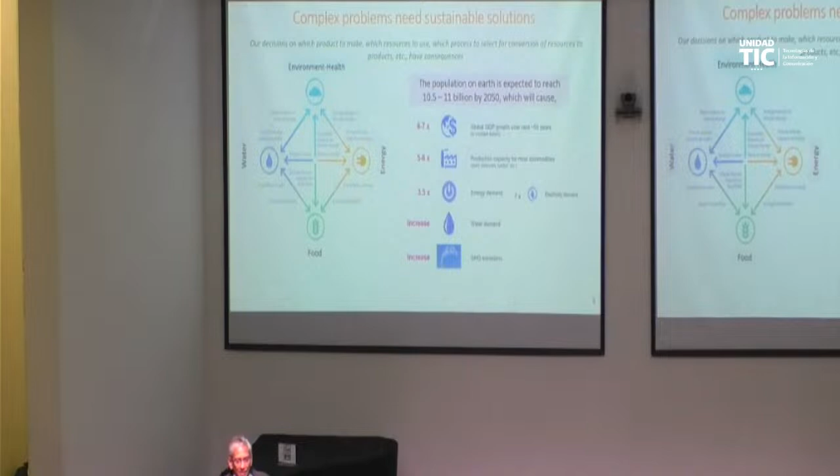And also, if we take into account that by 2050, we on Earth will have between 10 to 11 billion people, and because of that increase in population, the general GDP will need to increase. That will mean we will have to produce more products that we need on a daily basis. Because of that, we will need more energy, more electricity, more demand for water, and all these activities will increase greenhouse gas emissions.

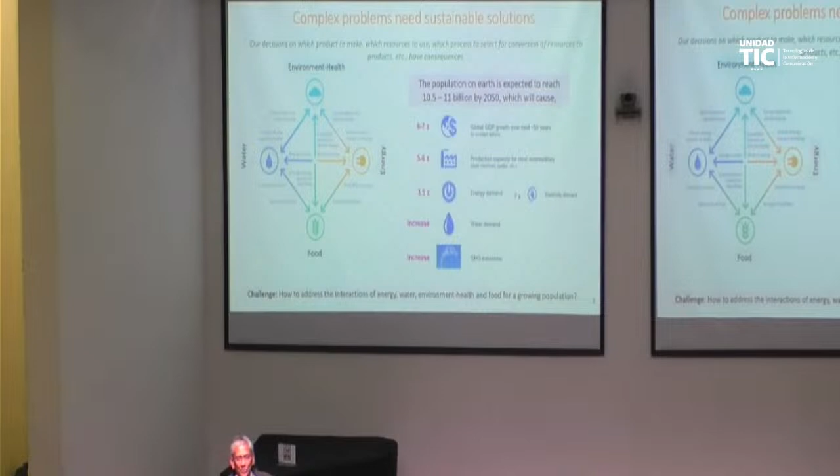So that's a complex, challenging problem. And the question is how to address the interactions of energy, water, environment, health, and food for this growing population, because the population is going to increase.

What this lecture is all about is what can we do to address those challenges. Let's review first how we are getting all the products we need to stay on top. We find out which resources we will use, and we will convert them to products. But in order to do this, we need to use energy, we need to use water, we need to use all kinds of resources.

And as a consequence of this, we impact the environment - the global warming potential increases, ozone depletion increases, toxicity level increases, and many more. At the same time, we produce a lot of waste. So if we think of that, all the processes that give us the products we need, from the raw material, the U-tube that you see could be representing all the processes on Earth. All the resources we put into the U-tube, and we get only 25% of useful products or useful services. And that is not sustainable.

It's too much waste. And according to most experts, and this last number was given in 2007, it has not changed very much. We need to improve our processes by order of magnitude, not small improvements step by step, but order of magnitude improvement. So for sustainability, significant and rapid improvements are needed.

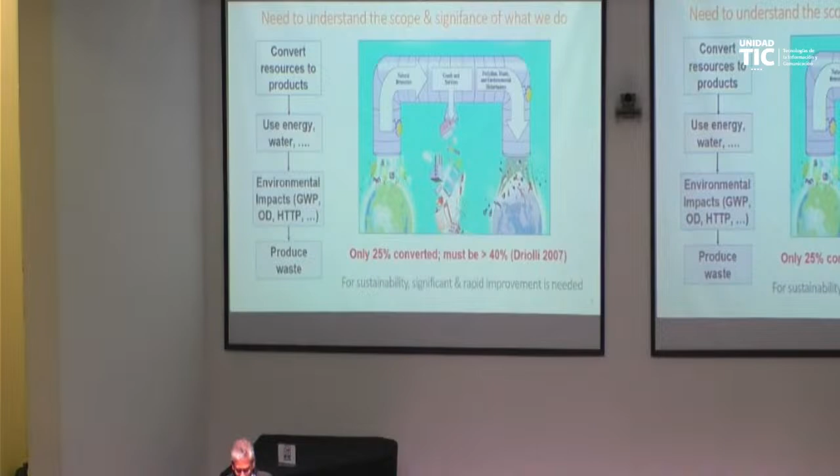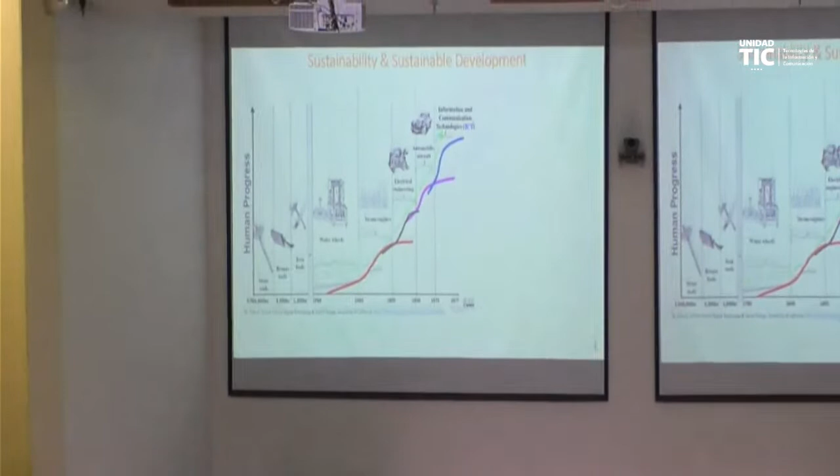Now I will briefly explain what we mean by sustainability and sustainable development. On the y-axis, you will see a green curve going up, representing human development or human progress on Earth. At different times, you can see some curves going up and going down. Those curves show different technologies that, before they became redundant, we found another technology to take over, so the green curve can always go up.

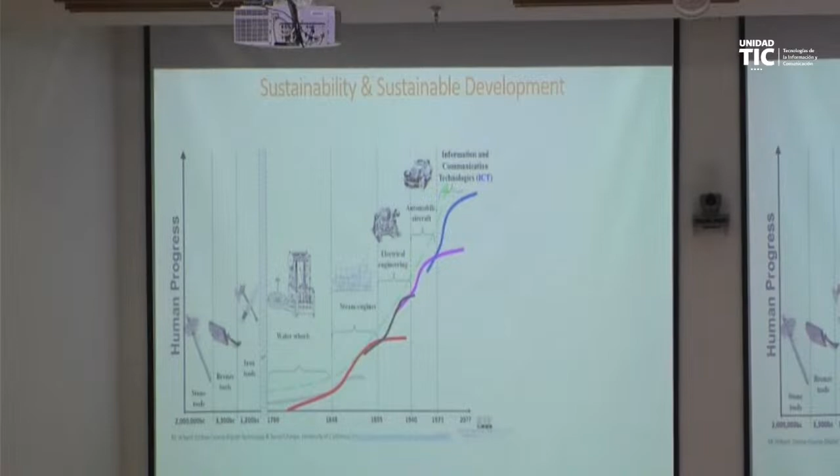And as long as this goes up and we can replace any redundant technology with some new technology, we on Earth can continue. So from that point of view, sustainability means the ability to sustain or the capacity to endure changes. And sustainable development means development that meets the needs and aspirations of the present without compromising the ability of future generations to meet their needs.

And this is a very important point. We have to question ourselves: are we doing what we are doing now without thinking of what will happen to the next generation? One could question that many of the things we are doing now are going to negatively affect future generations. But that is not what sustainable development was supposed to mean.

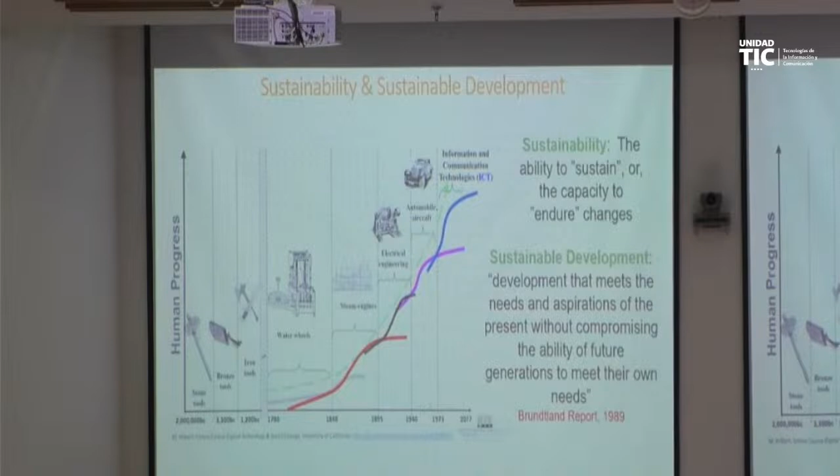One question is, which is the redundant technology that we are going to get rid of, and what new technology is going to come? Would it be a new way of communication through smartphones, maybe even smarter phones, or communication or travel? What would be the next technologies that before they became redundant, we found new ones? That hasn't been decided yet, but we have to see what will happen.

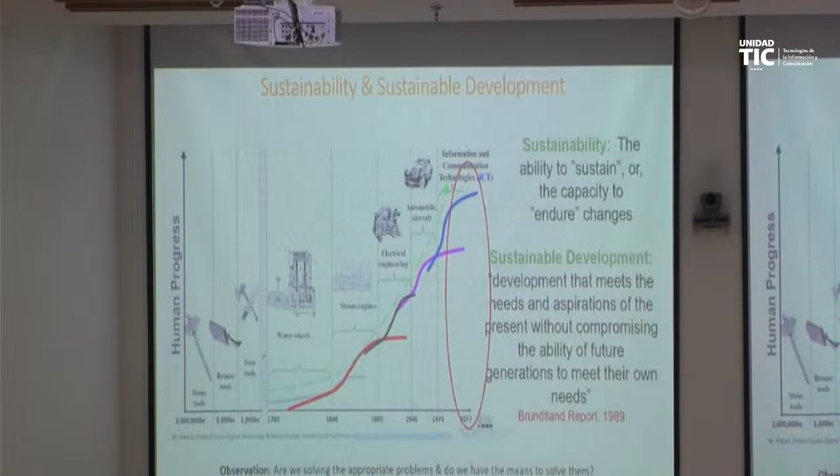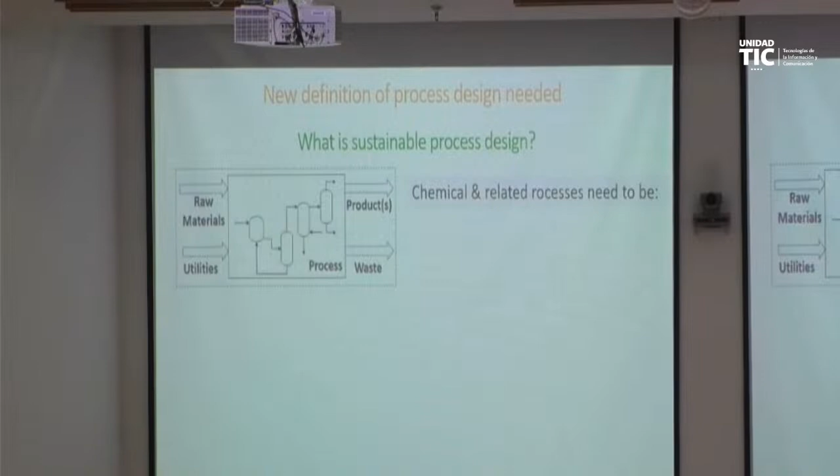We need to improve this definition. So we say that it has to be sustainable. That means it has to be economically feasible. It has to reduce the waste. It has to be utility efficient, meaning electricity, energy, water - they have to be more efficient in terms of usage. It has to be environmentally acceptable. It has to be safer. It has to be operable, and many more. All these things need to be included in the design of the chemical process.

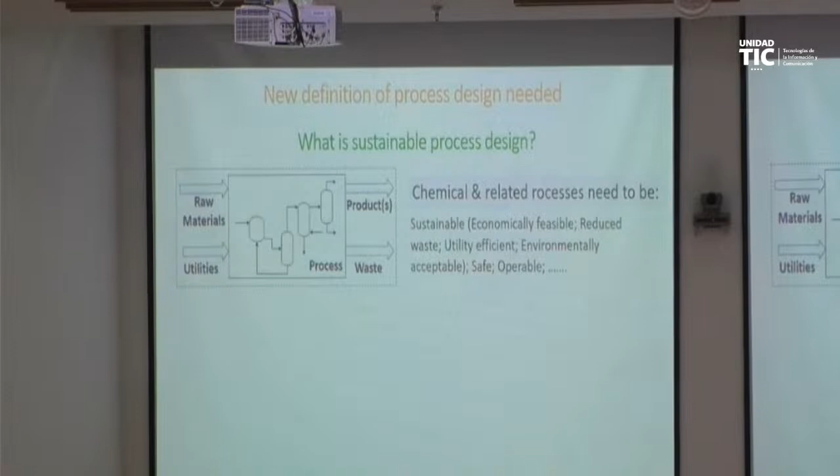So then what we can say is that in addition to satisfying all those criteria, the design that we make has to establish a sustainable production, which means how long in the future the process can work to give us the product, adjust to changing markets, survive global competition, tackle demands for innovative products, and many more. So sustainable process design in this case means synthesis of the process, design of the process, and innovation of the process.

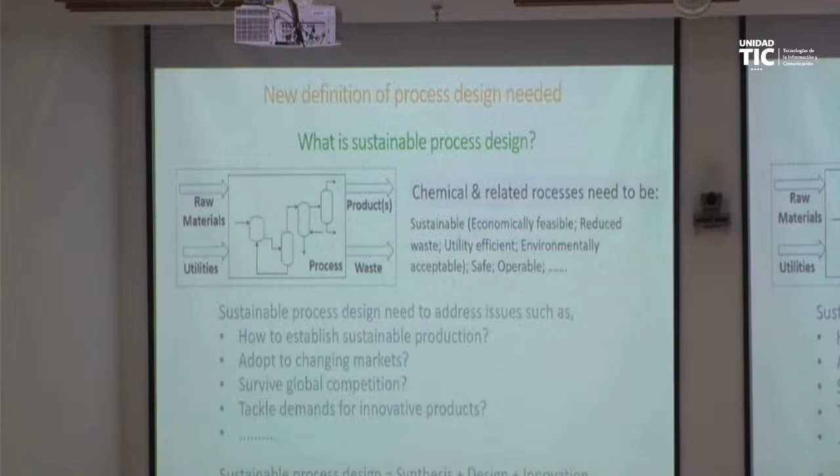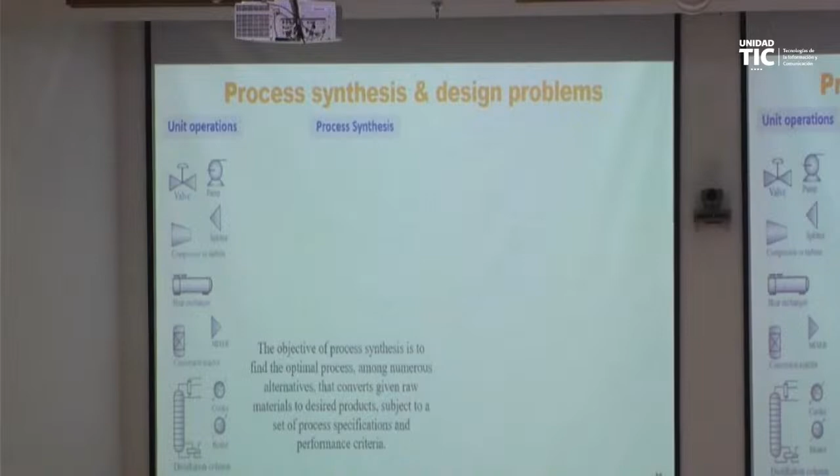And very briefly, what do we mean by synthesis? We mean that if we have raw materials and we want to convert them to a product, how many processing steps will be needed, and what kind of process operations would be needed. What you see on the left is a list of process operations. So how do we configure them, and in which sequence will they be needed?

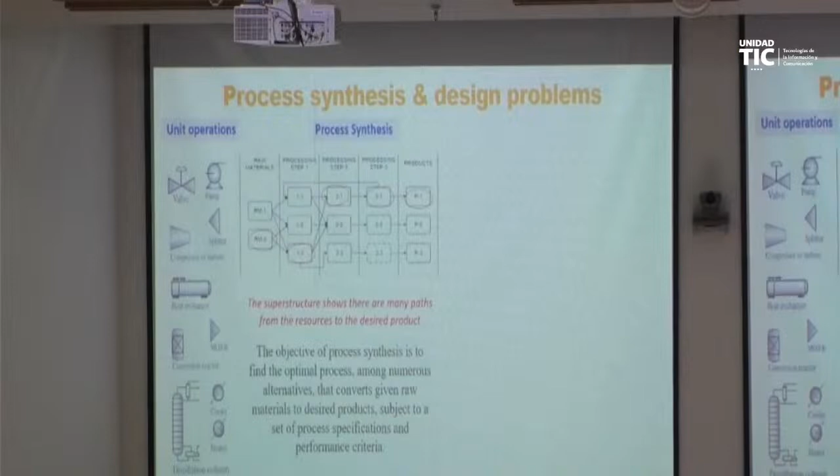So that would be a process synthesis problem. There are different alternatives shown in the picture, and what we want is the ones marked in red. So that would be, for example, an optimal processing path or a flow sheet that will convert a selected raw material into a desired product.

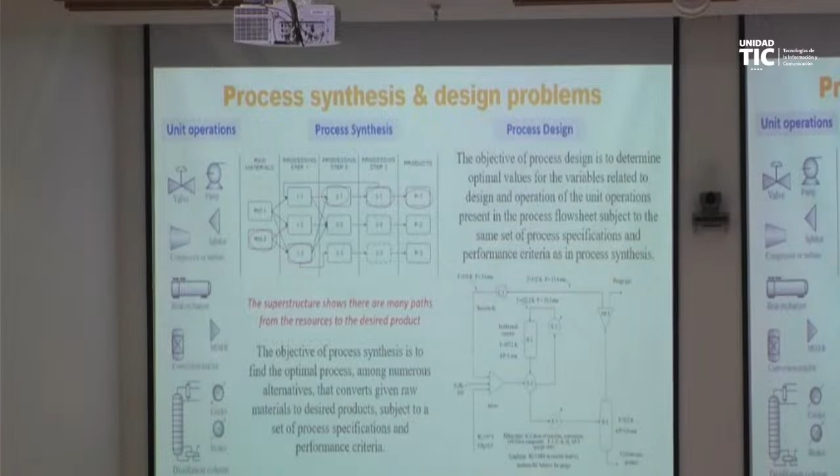But that's not enough, because that is just the process flow sheet. We need to know more details of that process flow sheet. We need to know what is happening in each of the boxes in the processing step, and that is the design. If that box is a reactor, we need to design the reactor. If that box is a separator, we need to design the separator, and so on.

And the reason we need to do all this design is so that we can calculate how much energy it uses, how much waste it makes, and based on this, we want to calculate the economics and the environmental impacts and so on. So that will be the design, but do we stop there and say that's enough? That is where we come now, because that is not enough. We have to prove that it is the best, and so we need to find more innovative solutions compared to what we have now.

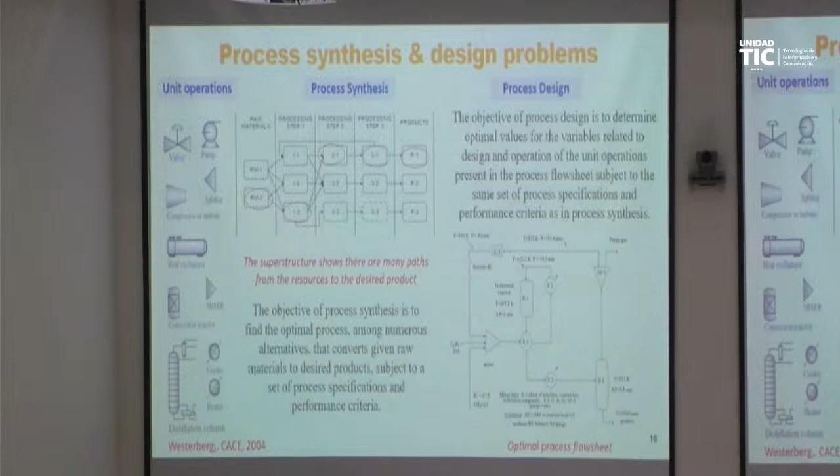So we take the design that we have, we look at different ways of energy demand, supplying of the energy demand, and we find out if it is energy that we would like to improve, how to do that. It could also be environmental impact, or effect on human health. All of these things we will need to look at, and we will need to improve.

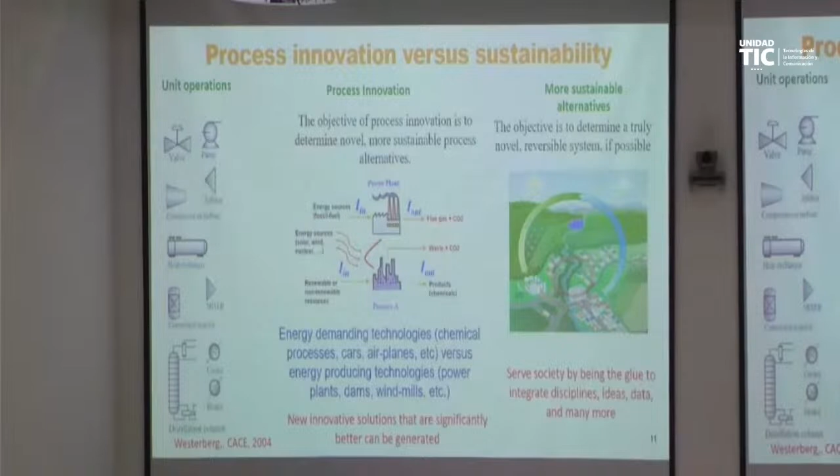And what we would like to achieve is something like an ideal, totally renewable system. In order to achieve this, we have developed what we call a multi-stage hierarchical solution approach. So the first stage, as we have shown before, is the synthesis stage, where we find the flow sheet, then the design stage, where we design, and then the innovation stage, where we improve.

The issues are, for any problem, where is the system boundary? If you're developing or building a plant in Bogota, should you think only of the environment in Bogota, or also the surrounding areas, or also all of Colombia? So all of these things need to be looked at. So the system boundary is very important.

Then models and data are very important. How much knowledge do we put in order to solve this problem? And also data comes from different sources. How do we make sure that all the data are consistent?

This gives rise to a multi-objective, multidisciplinary problem, and we need to tackle that. From a chemical engineering point of view, chemical engineers are good at gluing all the different things together and solving multi-objective, multidisciplinary problems. We are the glue that puts everything together in a very smart way.

So what we are doing, at least in our method, is using all the prior information and knowledge that we learn in the bachelor, master's, PhD. We need to use all this information in the solution of the problem. In addition, we use computers to speed up the solution, because what we can do by hand in 1 hour, the computer can do probably in 1 second. So if we can use the computer to do all the things we can do ourselves but that take a long time, we will speed up the process.

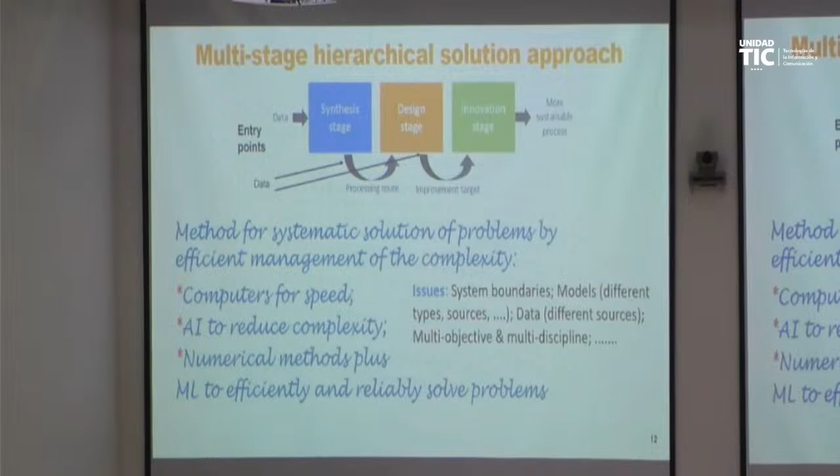You've heard of artificial intelligence. We should not use it blindly. We should use it so that the complex problem we have can be simplified. We use a lot of models and data, and to solve this complex problem we can use techniques like machine learning. We selectively use these techniques together with our a priori knowledge to find the best solution.

So now we come to how do we use new and useful concepts. These can be, as I mentioned, artificial intelligence, machine learning, cloud computing, and many more. Our models, solution methods, and computer-aided tools need to use these techniques. We want to solve problems correctly, consistently, and very rapidly.

Then the question is, how long should the solution of sustainable process design problems take? I didn't put 1 minute, but we could also put 1 minute. Should it take 1 minute, 1 hour, 1 day, 1 week, 1 month, 1 year, or more? We would like to solve it very, very fast. We don't want to wait for 1 year or not even 1 month.

And then the basis of all that we are doing, I will show through a multi-layered view of chemical engineering. As we said, our core work in chemical engineering, which you see at the center, is to convert raw material to products we need, and we need a process for that. So from left to right, resources are coming in, and we are converting them to products that we need. But we need a process.

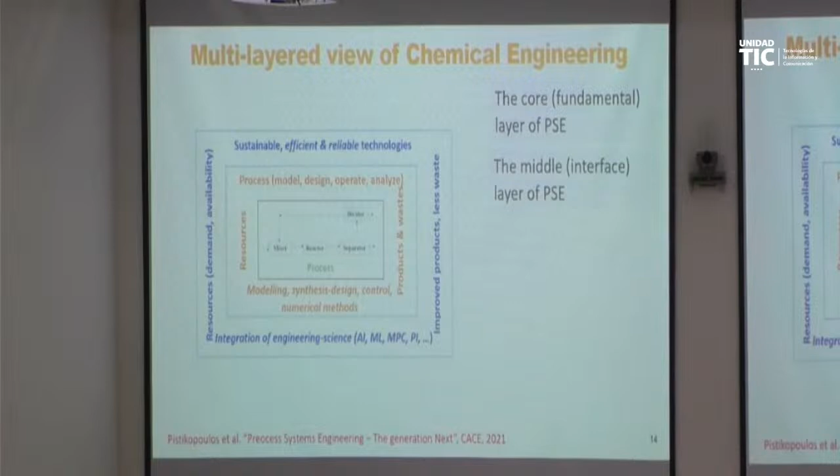And then we can ask, is that enough? I would say no, there is one more layer needed, because we have to think of why we are becoming chemical engineers. We have a duty to perform to society. So our final product is towards, we can call, circular economy, sustainable development of society. Remember that we humans need to be at the top on this planet Earth. So that will ensure that we are there.

And then to do that, we need to use different ideas, different disciplines, data sources. We need to integrate all of that. And as far as resources are concerned, we now not only look at demand and availability, we also look at location, recovery, recycle, all of this. All of this then gives us the perfect product and the process that we need.

The core is the fundamental layer of process systems engineering. Every chemical engineer needs to know that—should be able to convert raw material to product and design a process. That's a must for every chemical engineer. Then, with that foundation, they can pursue a master's degree, PhD, and further improve on that fundamental design. Based on experience in the fundamental and middle layers, they can serve society. So that is the multi-layered view of chemical engineering, very important for our sustainable process design approach.

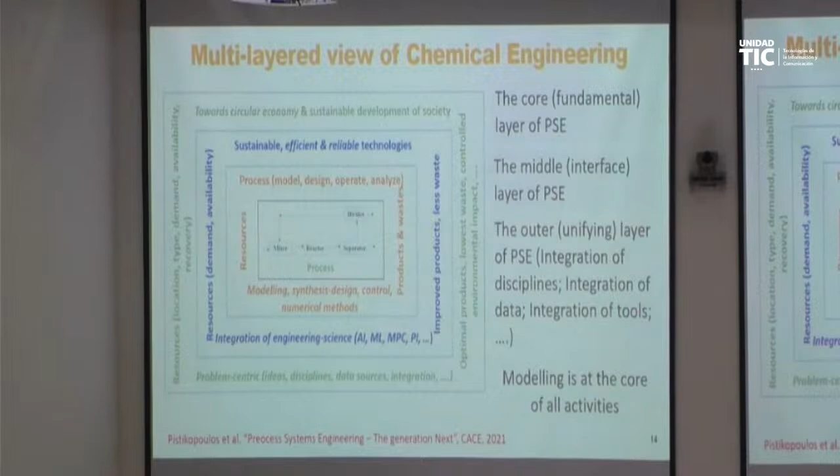Why do we need models? On the right-hand side, you see the problems we would like to solve—related to design, production, planning, safety, and many more. On the left, you see the system for which we want to solve this problem. It can be process or product, operation, environment, even business. We want to solve these problems. If we knew enough about the system, we should be able to solve the problem. But unfortunately, we do not know enough, and we do not have enough data. So in order to know enough and to have the missing data, we develop models of the system.

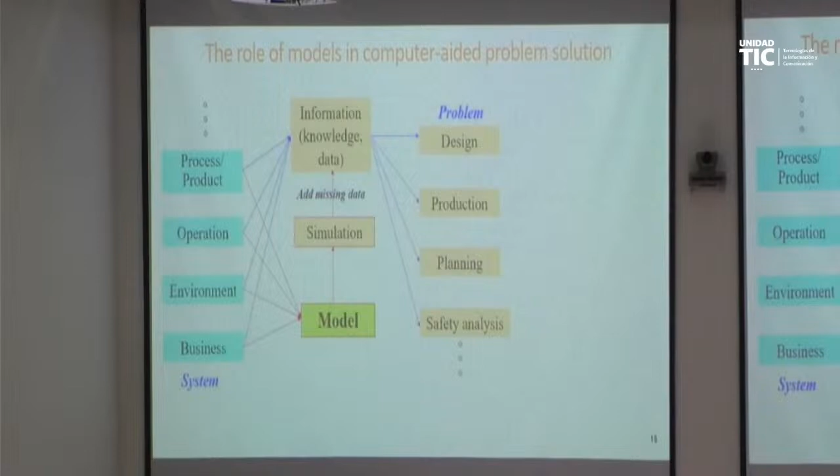By solving the model equations, we generate additional data that helps us solve the problem. Once we have the model, we can develop model-based systems, and then we need numerical solvers like ML and others to help us solve the problem. We also need algorithms and methods that use the models to do the design—that's where AI can come in. So all of these are needed, and modeling is at the core.

Examples of model-based systems are model-based systems for process synthesis, process simulators, control monitoring systems, planning and scheduling systems, and many more.

The objective of models and modeling, remember, should not be just to replace experiments. That doesn't help us get innovative solutions. We need innovative predictive models.

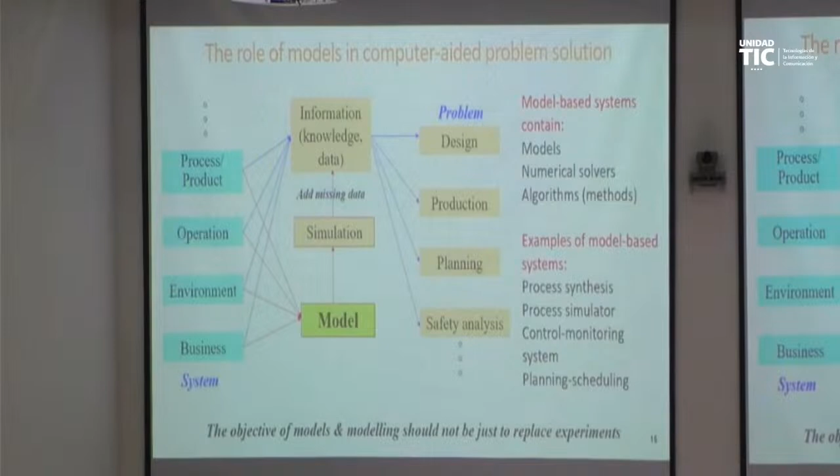Since I said one of the model-based systems is a process simulator, that's again one of the most important model-based systems we have developed. At any time on Earth, somebody somewhere is using a process simulator. That's very good—that's what we have developed for society.

But is that enough? We have the process simulator. Can we solve all the problems we have, or the complex problems we have? Sometimes when I talk about this, people—mostly from industry—say, but we have Aspen or we have PRO/II. So the question would be: can Aspen or PRO/II solve the problems I'm talking about?

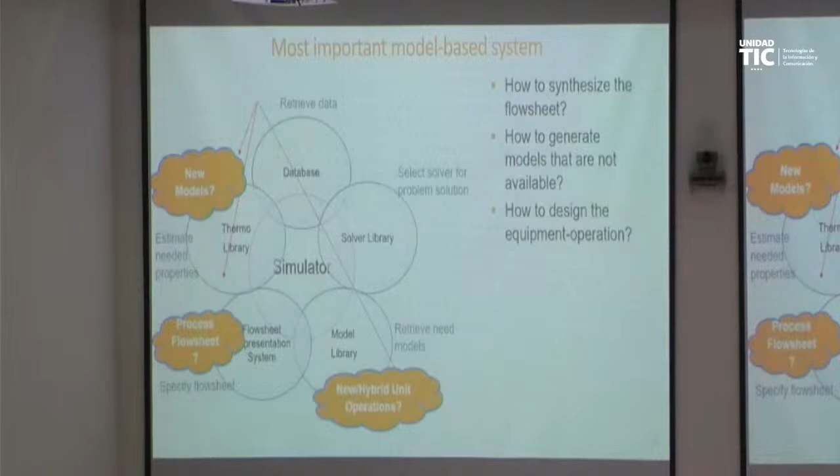Let's say we did not have the process flow sheet—can the simulator give us the process flow sheet? Or if we didn't have the model we need and couldn't find it in the process simulator, can it give us that model? Or if we needed to design an innovative new operation, will the process simulator be able to handle it? Or if we wanted to use a new catalyst or a new solvent, how do we introduce those?

So what we see is that these tools are not in the process simulator, but to solve sustainable process design, we need them.

So what I would say is that we can still solve these problems, but as a trial and error method. What do we do then in a trial and error method? If we didn't have a flow sheet, we give our assumption of a flow sheet, we solve all the problems. If it does not satisfy our requirement, we try again. So it's a trial and error method. By accident, we can get a good solution, or we can try and try and try and never get the solution. Or even if we get a solution, we cannot be sure that it is the best solution.

If you remember, we had the objective to improve our process by an order of magnitude—trial and error is not going to give us that unless we are lucky or get it by accident. For sustainability, we should not depend on luck or accidental solutions; we have to be able to find them. So how does a process simulator perform all the extra activities? By trial and error. We want to avoid the trial and error.

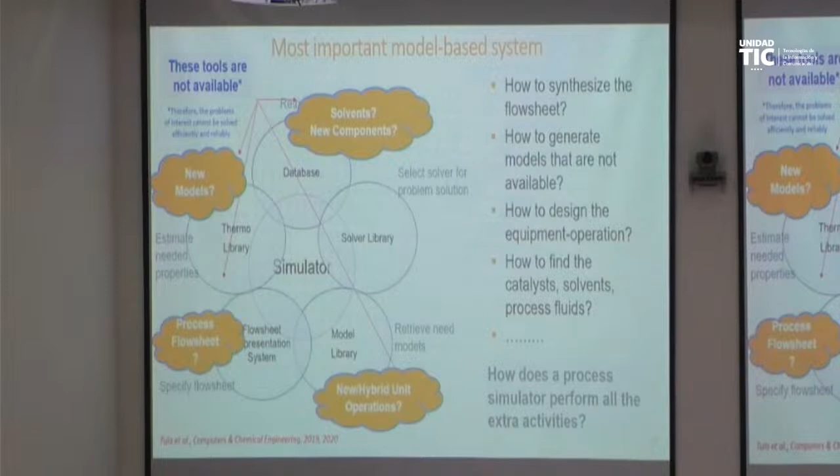So our proposal for an integrated system where we put all the additional tools that are needed is shown here. At the top, it's a complicated diagram, but I'll just show you the main features of it.

On the left-hand corner is the library of databases. We need a lot of data, so we have to have not just one database, but a library of databases of different kinds. Then we want to do some fast calculations. We don't want to depend on whether the process simulator has all the models, has all the data, can solve these problems, so we can develop new, faster models that can give us the data we need without doing the detailed process simulation.

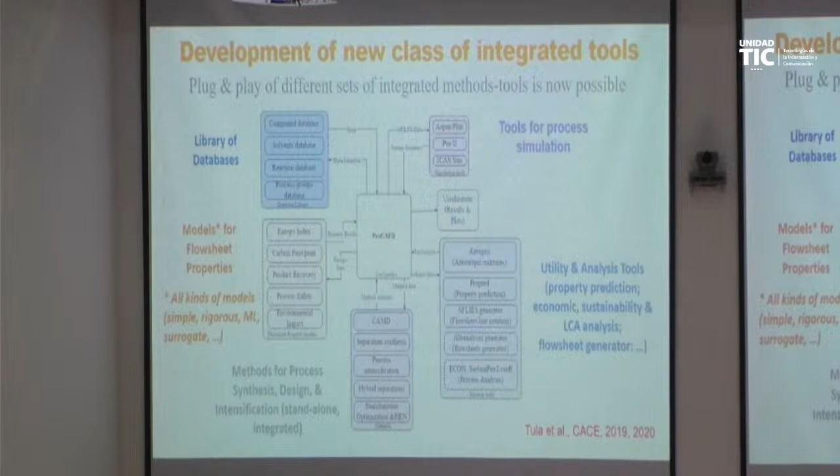If we do not have a process flow sheet, or we do not know which catalyst to use, or we do not know which solvent to use, we can develop methods that will very quickly tell us which materials should be used. Once we have all of this information, we can actually use a process simulator. And then after that, we need to analyze with respect to sustainability, economics, and life cycle assessment, and find out whether that process can be improved further or not. So in all of these activities, process simulator is just one step. That's why if we just base it on process simulator, it's not going to solve our problem. We need all these other tools and methods integrated together so that we can solve the problem very, very fast.

So as we said, we have a three-stage method: synthesis, design, analysis, decomposed into 12 tasks. The first three tasks are related to process synthesis. Tasks 4, 5, 6, 7 are related to rigorous simulation, but step by step, not directly going to rigorous simulation. Then 8, 9 is analysis, trying to find the economics, the sustainability, and find where the weak points of the process are. And finally, 10, 11, 12 are steps to find innovative new candidates. There, the approach is to define targets for improvement and match these targets through alternatives, and by definition, if we can find an alternative, it will be more sustainable.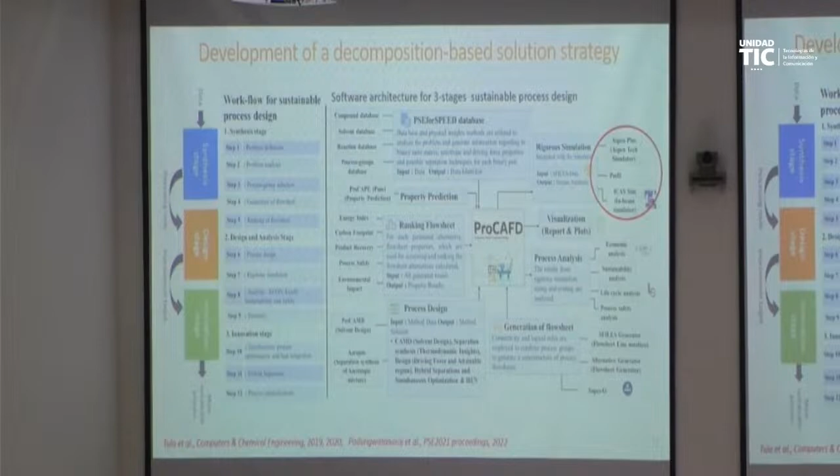Now we can also see that all these products we use every day, even the bottle for the water and many others, these are all chemical-based products coming out of chemical processes. And how did we design them? 30 or 40 years ago, did they have all these tools? They did not, but they did it by experiment. And these are still being done by experiment. I would say more than 90% of products and processes are designed by experiment.

And that is fine, because the solution we get is verified by experiment. The only problem is we do not know if it is the best. We know that a solution is there, it works. And maybe it took a long time, and maybe it was costly. But we get a product or a process that works because it's verified.

Now, that is what I will call reality. What happens if we replace reality with virtual reality? You have heard these days of terms like computer-aided things and digitalization and so on - that's the virtual reality. But will virtual reality give us the advantage? Let's say if virtual reality uses the same data from reality and makes a model and then finds the solution, then by virtual reality, at best, we can find the same solution we could have found by experiment.

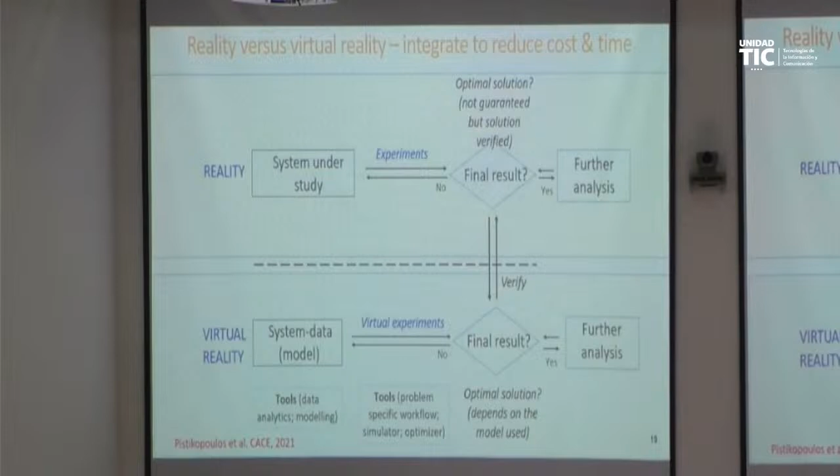And that can be done also through integration between reality and virtual reality. We help the reality, that is experiments, by telling them under what conditions the experiment should be done so that useful data can be obtained. And then the data can be used in virtual reality to get models that would be predictive, outside the box. And that's what we need.

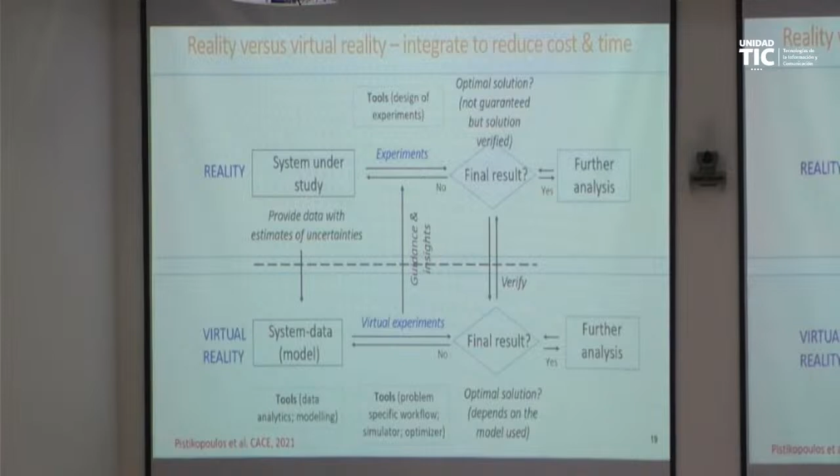And so now, with that as the background, what we see is that whenever we want to solve sustainable process design problems, we need to make a lot of decisions. And one of those, many of those decisions are related to defining the correct problem to solve.

So that's very important. Also, we should not get wrong conclusions based on what we see. So yes, we can see many things. AI can help, but we need to be careful.

So now the kind of problems we can solve, like we can improve the process. Process intensification has been said that it can improve the process. But process intensification can mean many things to many people. Let's define: process intensification can mean higher productivity, species utilization, multitasking, increased efficiency, safe and reliable operation, economic improvement, and many more. Which of those criteria are we going to satisfy?

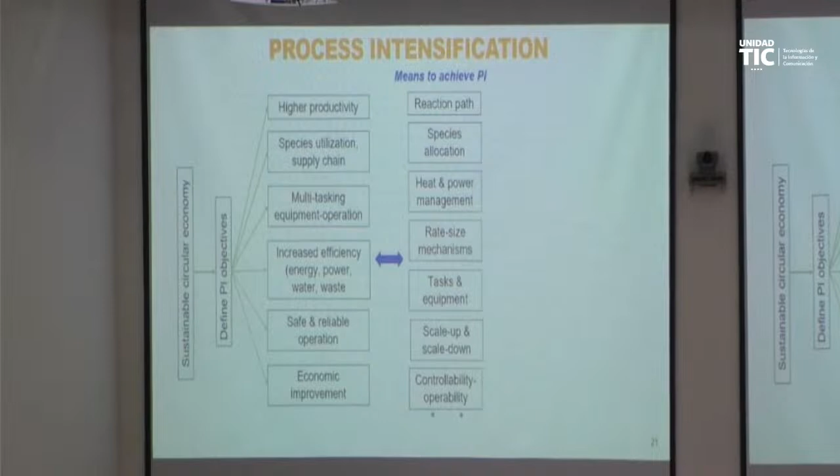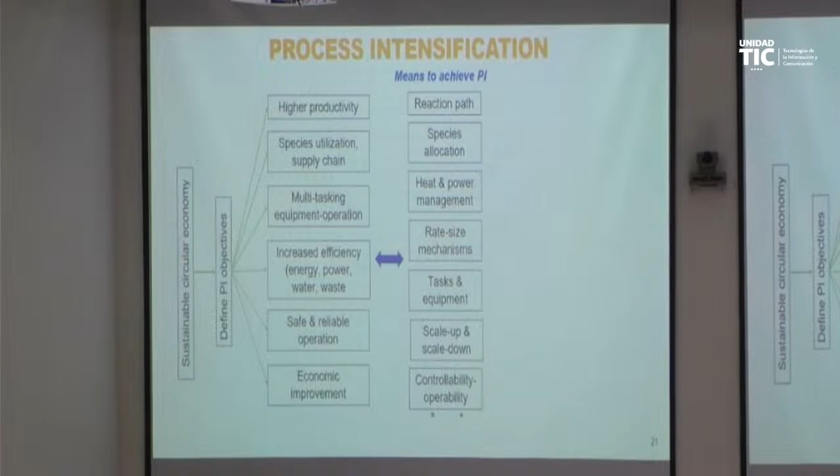We have to decide that. And then if we decide that, what would be the means by which we should achieve it? Should we find a better reaction? Should we do better species allocation, better management of heat and power, reduce size or increase size, define different equipment, and many more? So these would be the means to achieve.

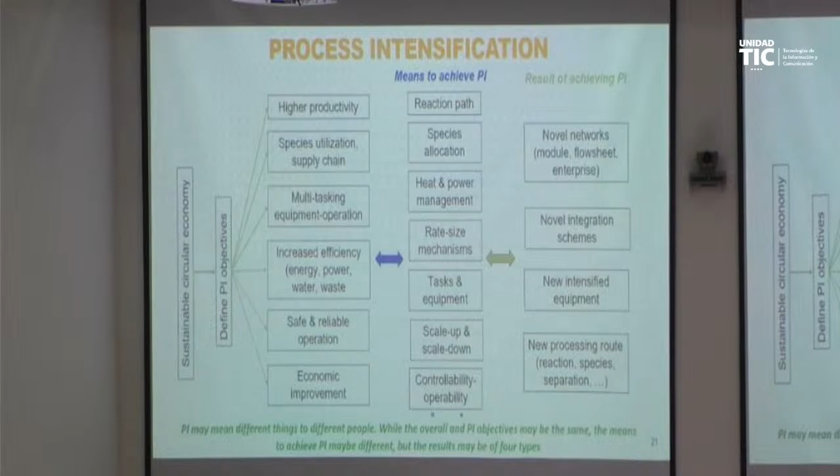And then there are methods by which we can achieve it. So we need to identify what we want to improve, how we want to improve, and then we can use the method to improve it.

And the same goes for decarbonization. It can mean different things to different people. So let's say at least three of those measures we can say: decarbonization would be CO2 released versus resources used, temperature increase. It can also mean effects on climate, availability of resources, uses and needs of products.

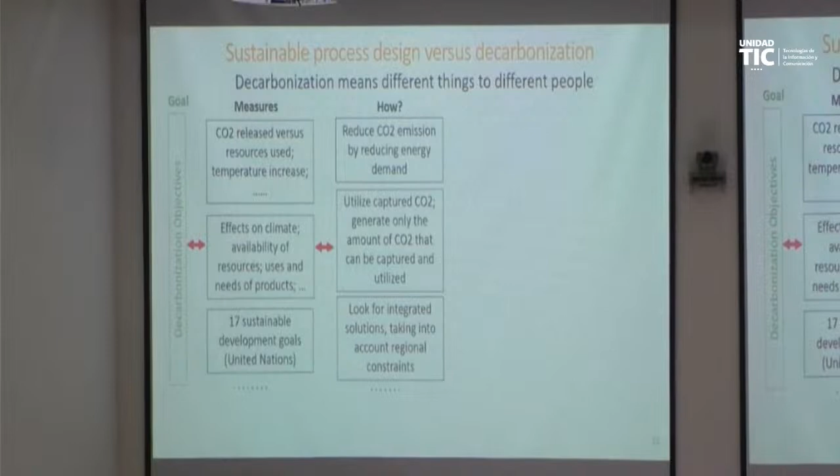It can also mean or be connected to the 17 Sustainable Development Goals set by the United Nations. How do we achieve these? We have to reduce CO2 emission by reducing energy demand or utilize captured CO2, so generate only the amount of CO2 that can be captured and utilized, look for integrated solutions, and many more.

And then there are different means to do that. So again, if we say we want to do decarbonization and we want a sustainable process design, we need to define the problem correctly. And here, at least we can be grateful for some of the institutes that are studying these things, because they have studied from now until 2050, if we want to satisfy the requirement of 1.5 degrees increase in temperature and no more, how much CO2 needs to be captured. And out of that, how much should be from the industry.

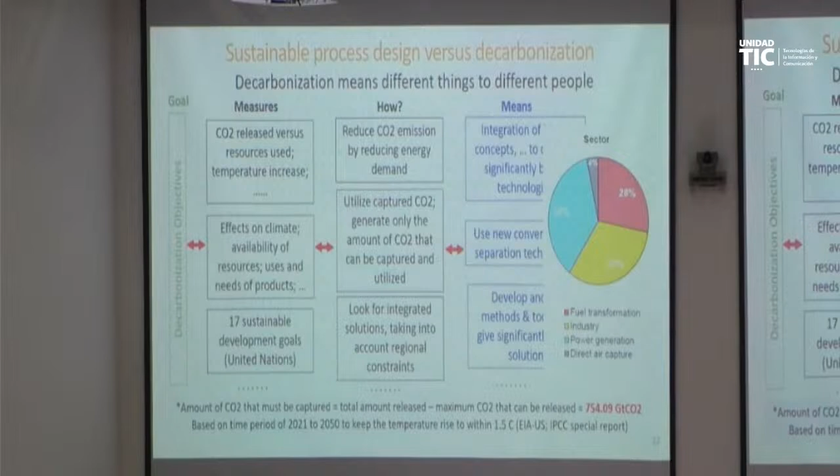So now we have a very well-defined target. Can we find all the chemical industries and others that are releasing the CO2? Can we capture them or redesign so that this CO2 will not go out? If we can make sure that this amount of CO2 does not go out, we are sure that we can satisfy the 1.5 degrees increase in temperature.

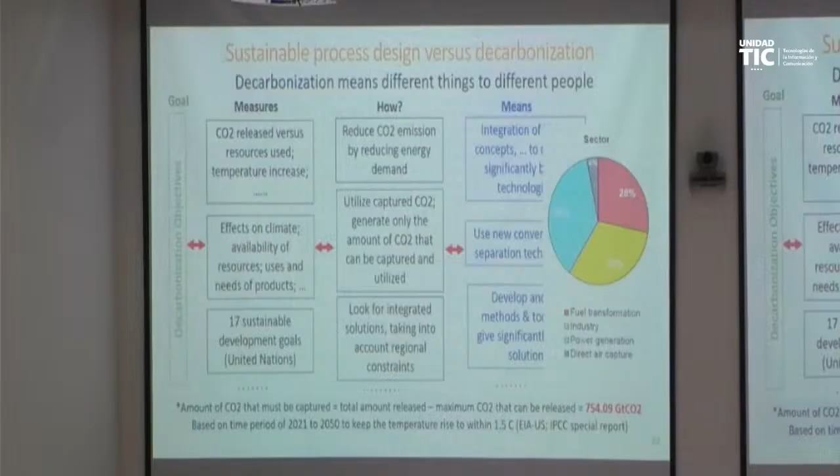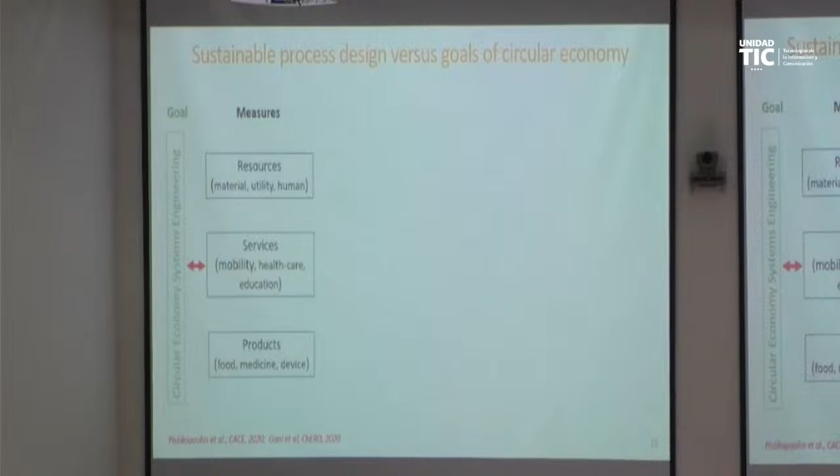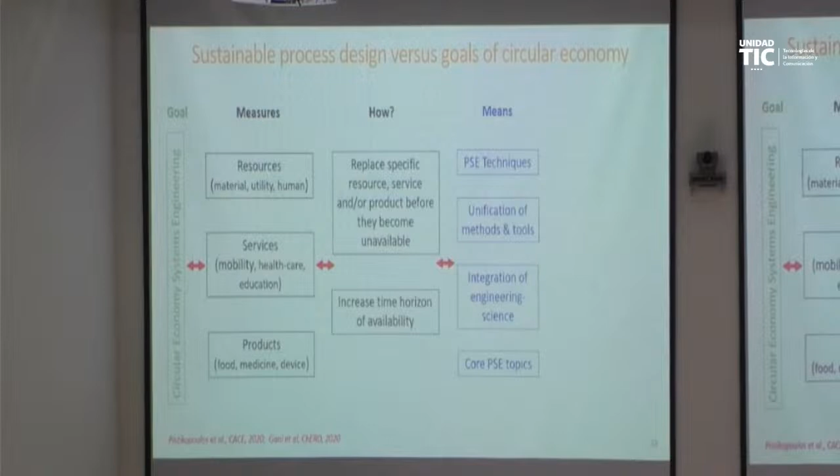And the last one would be circular economy. It's a very hot topic, but what does circular economy mean and how is it connected to sustainability? Again, there are different measures of circular economy. How can we achieve it? What are the means to achieve it? And what kind of research is needed to achieve it?

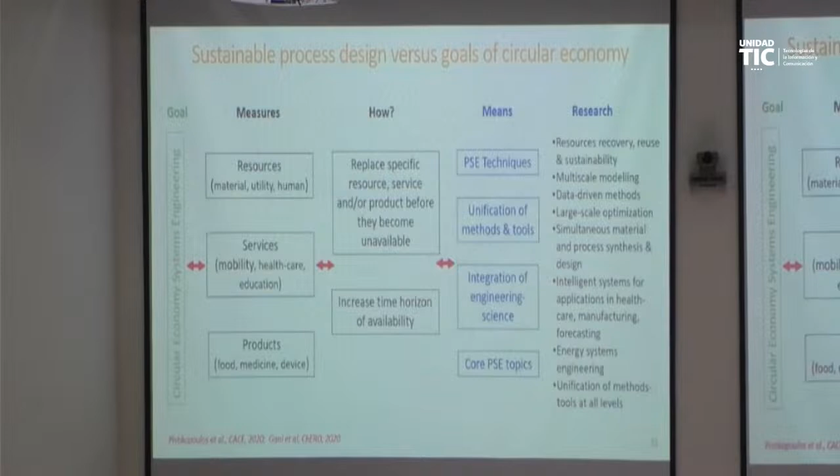Then finally, I'm not going into details of this, but I will show you some examples later. The last point in here is how do we define the problem? If you look at this plot, on the y-axis is environmental impact, on the x-axis is economic profit.

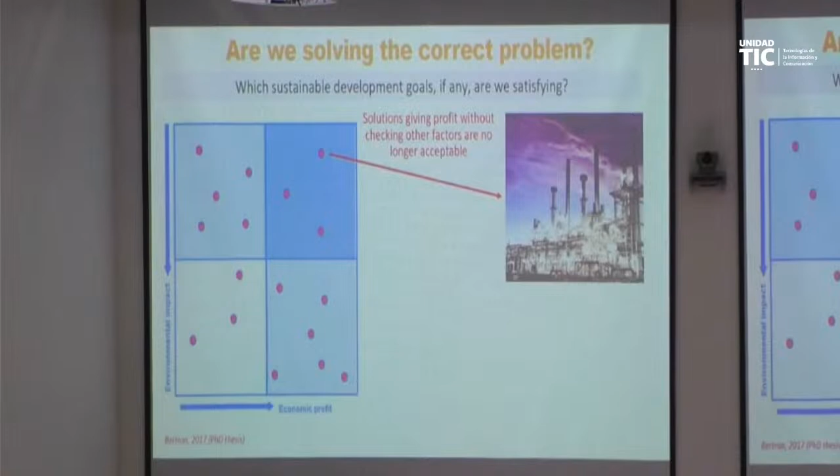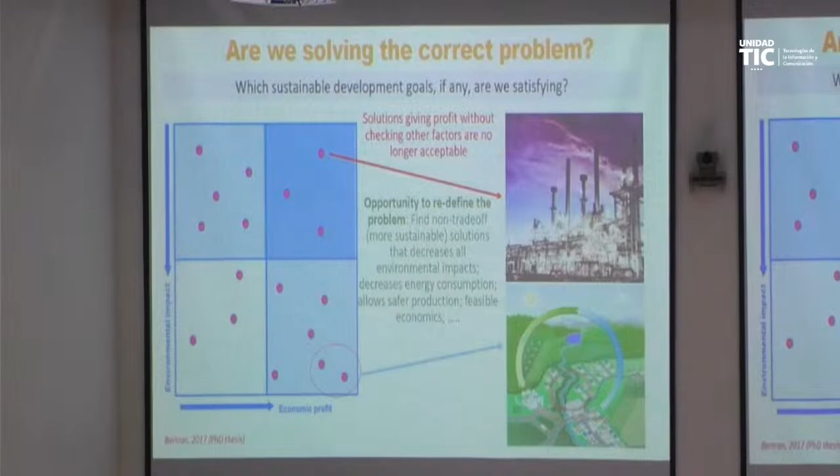Should we go for profit? Don't worry about the environment? That's what we will get. Or should we worry about both? And that's what we will get. So we need to define the problem so we know which solution we are going to get.

So next comes the scope and significance of the problems to be solved. Should we depend on a single source of energy, or should we look at multiple sources of energy and combine them? Also, what should be our solutions - in the short term or in the long term?

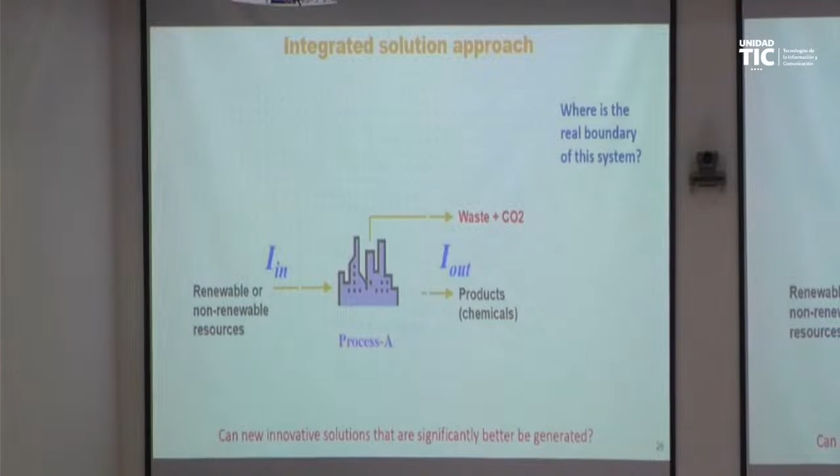In order to operate the plant, we need energy from a power plant. So although we generate no CO2 ourselves, the power plant will. The indirect CO2 in this case can be very large. So we need to see which are the energy demanding technologies, like a chemical process, a car, or an airplane, they all require energy. And which are the energy supplying processes, like a power plant. Then for that energy supplying process, which raw material should we use? Fossil fuel, solar, wind, or nuclear? We need to find a good combination so that we have a sustainable solution with net zero CO2.

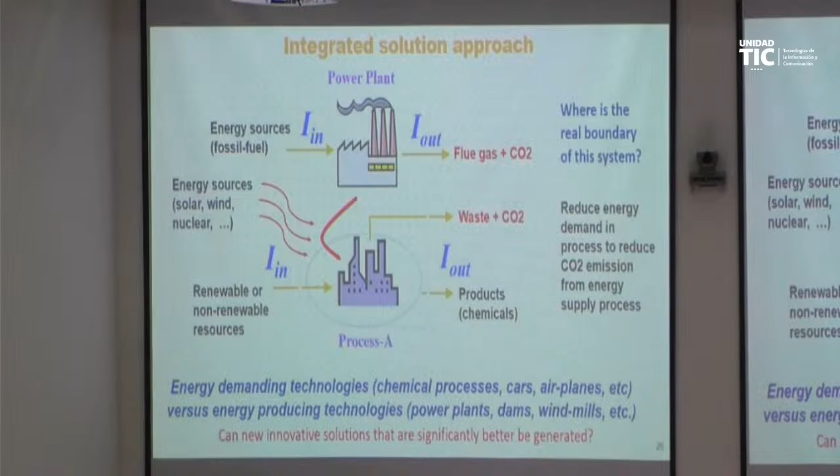Here is an example of what could be done. We have the power plant, and other processes where CO2 comes out. We capture this and use it together with our raw materials in the process. Then we get our products, and whatever waste we have, we try to recycle. If we can find a solution like this, that would be the kind of solution we are looking for. Decarbonization would be a good example.

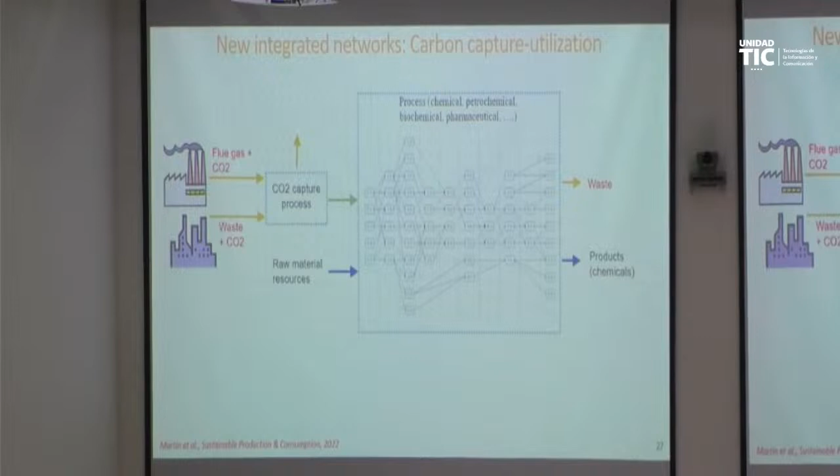I will come back to this. This is a real problem solved according to what I showed. We captured the CO2 coming out from a power plant, designed a process, and wanted to go to zero CO2.

So here is the part that captures the CO2. Then we use different alternatives to create the hydrogen, make the hydrogen. We use the hydrogen and CO2 to make different products, and we have used at least some of the CO2.

But the question is, how much of the CO2 have we used? If we look at the results, they look very good. We have achieved, within that boundary, a negative CO2, and we have also achieved profit. That is very fine, but only part of the CO2 we captured has been used, because for the product, 1 mole of CO2 gives 1 mole of methanol. But we capture much more CO2 than we can use for methanol. So what we have is a lot of excess CO2 captured.

And what do we do with that? It turns out, at this moment, we can only sequestrate it. Otherwise there's no other solution for it, unless we can increase the demand for methanol so everybody uses methanol for everything, then it will be good. Otherwise it's not possible. So even though this looked like a very good solution, unfortunately most of the captured CO2 has to be sequestrated.

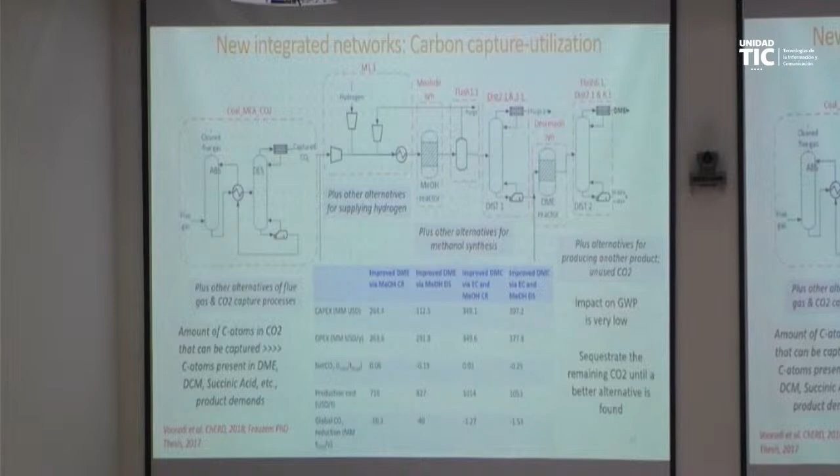Process intensification tells us that if we have a chemical process, we can convert it into a reactive distillation, or combine different distillations into a dividing wall column, or combine distillation and membrane into a hybrid membrane separation. All of these things can be done. But these designs can take a lot of time and effort to find out. And then do we find out afterwards, after analyzing everything and designing the reactive distillation, that it was not really good and didn't satisfy our requirements? All that time would be wasted.

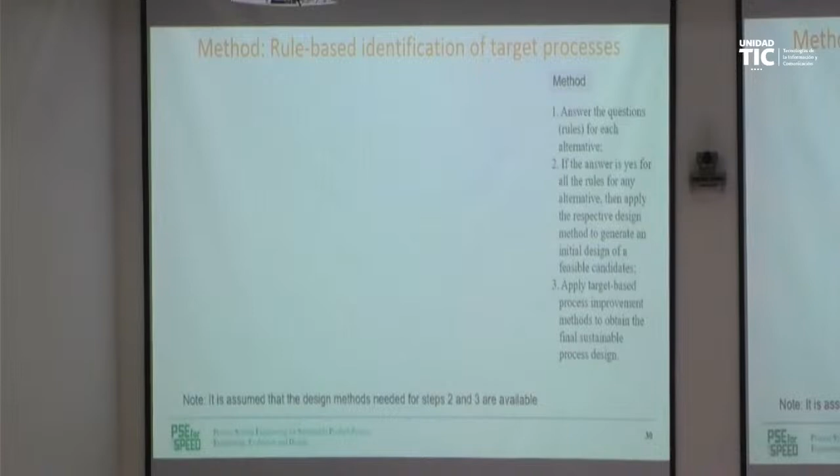So what we have done is develop a simple method where we ask 7 questions. If the answer to these 7 questions is yes, then that technology can be used. Here are the 7 questions for reactive distillation.

Based on the original process, we can ask: is the reaction exothermic? Is there only one reaction? Does the reaction and separation involve liquid and vapor, and so on? If all the answers are yes, you can take that process and find a reactive distillation design that will save at least 20 percent. That's the minimum target for improvement. Similarly for a dividing wall column, and similarly for hybrid separation systems. And to answer these questions, we already have all the data for the process.

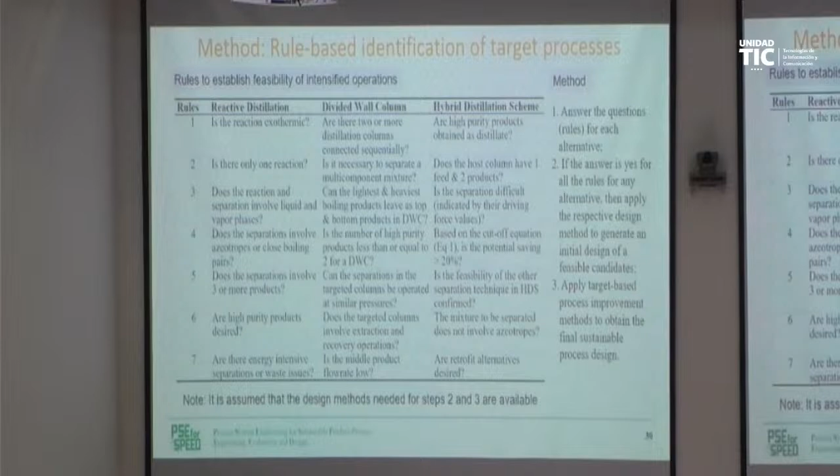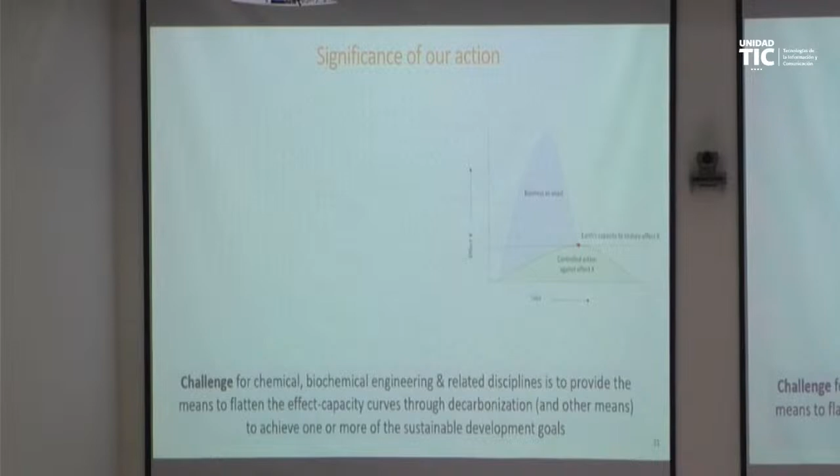Before going to the examples, let me show what we're doing with these techniques. This kind of curve may be familiar because of the pandemic and COVID. On the y-axis is number of infections or deaths, and on the x-axis is time. If no action is taken, we go up the gray curve above the horizontal line, and we have a lot of deaths and problems. If we can take action and make the curve flatter, below the horizontal line, then we've solved the problem. Whatever the problem is, we're trying to flatten the curve to solve it. A measure of solving that problem are the 17 Sustainable Development Goals.

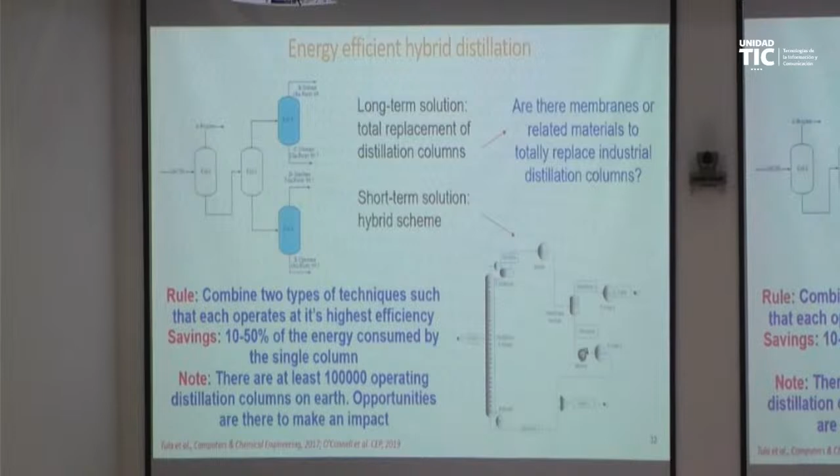The dividing wall column is a chemical process where we make different combinations combining two distillation columns that are next to each other. If we do that, we save around 45% of the energy compared to the original process, and that again is a short-term solution.

I'll skip the remaining and show an example of reactive distillation. This is a process to make methylene chloride from hydrochloric acid and methanol. This is the original process, there's a patent for it, you can find all the information. We asked the 7 questions, and the answer is yes for all 7. The base design used a lot of energy, and the purity was 96%.

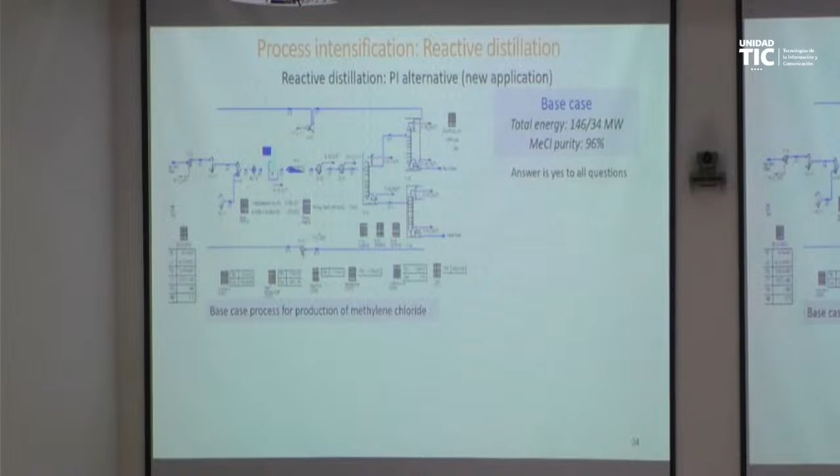Because the answer to the 7 questions was yes, we could design a reactive distillation, and in addition we needed a separator. You can see how much energy we saved - nearly 90% - and the product purity is better. We can also find another alternative with similar improvements. So we didn't have to do trial and error here. We had the original process, we asked the 7 questions, the answer was yes, and we went directly to the reactive distillation solution.

Then I talked about capturing CO2 and utilizing it to make a process, but also integrating it with the energy source - how to get the power, the water, everything. We can combine all of this together and design a profitable process that is also net zero CO2. This is a process we designed in China, making xylitol, totally self-sufficient. They have sun, so we use solar energy. They have a lake, so we use water from the lake, and everything is self-sufficient. It generates no CO2 and gives profit to that location.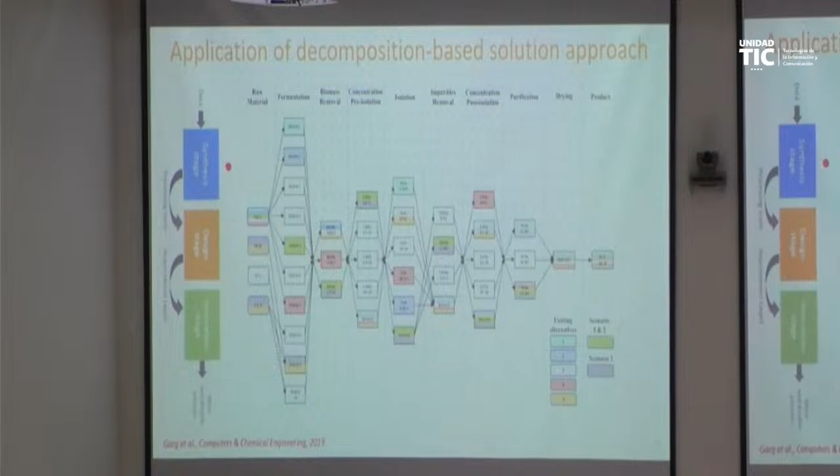Application of the decomposition method in synthesis design and innovation. Again, this process shows it's much better than what's in the literature - this process makes succinic acid. In the different columns, there are boxes with different colors, meaning these are already known technologies. We take these known technologies, combine them together, and try to find one combination better than all the others found. The different colors represent different existing processes, and we found a process that is better than any of the others.

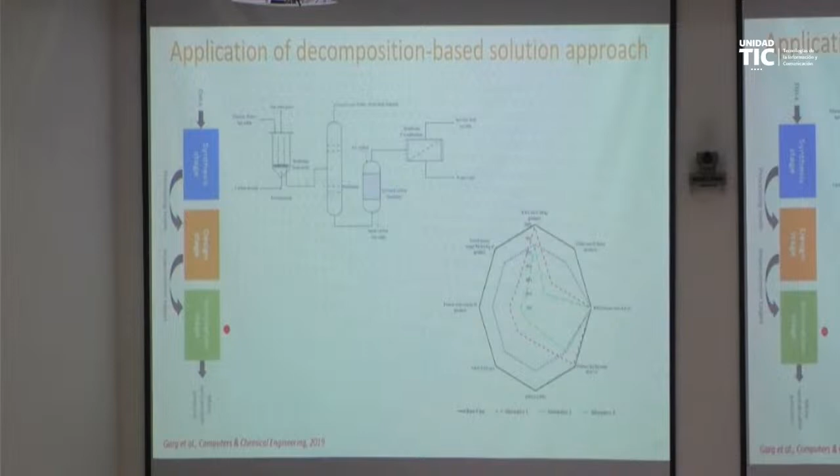If we compare, using process intensification, the number of operations here is much less than in the other one. So that's an intensified solution - a totally innovative intensified solution that does not currently exist. Compared to the base case, which is the boundary, we have alternatives that are much better. That's an example of sustainable process design.

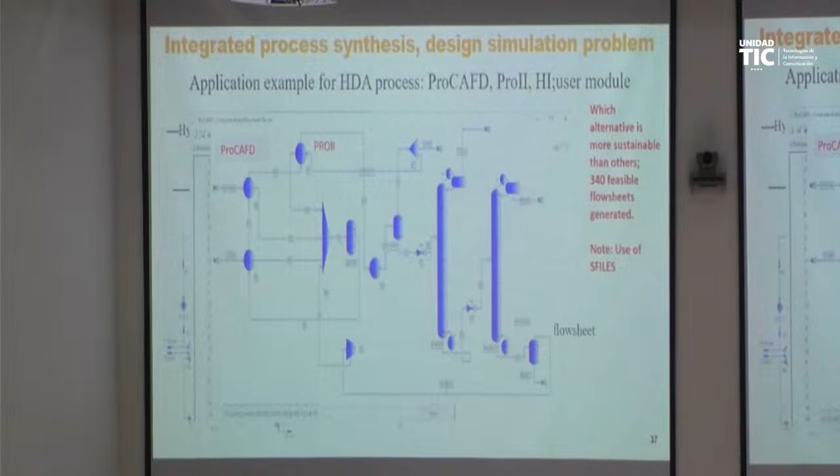We can also do this for other chemical processes. I'll go through this quickly. We combine hydrogen, methane, and toluene to get benzene and biphenyl, and the process flow sheet at the bottom is obtained by synthesis stage, then we design it, generate all kinds of alternatives, and the final optimal design is this one. We do the cost analysis, sustainability analysis, everything, find where improvements can be made, and generate the final improvement. At the bottom you can see the profit - our first solution gave 933, our last solution gave 1,527. So significant improvement is possible through synthesis design and innovation.

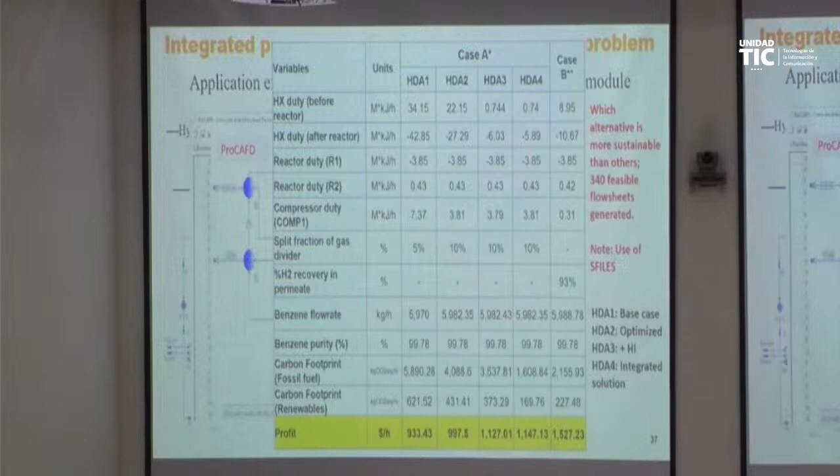One thing I did not discuss up to now is we are talking about chemicals, use of chemicals, products that have chemicals, and these chemicals can be dangerous. Some of them are very good, some of them are not so good, but some of them are very bad. And if we do not know about those chemicals we are using, then we are driving a car blindfolded.

So anytime we can have an accident. And the reason for that is, up to now, we have data only about 40 to 60,000 chemicals, but we are using more than 1 million chemicals. So are we just waiting for the next disaster? What can we do about it? We have to be very careful of this.

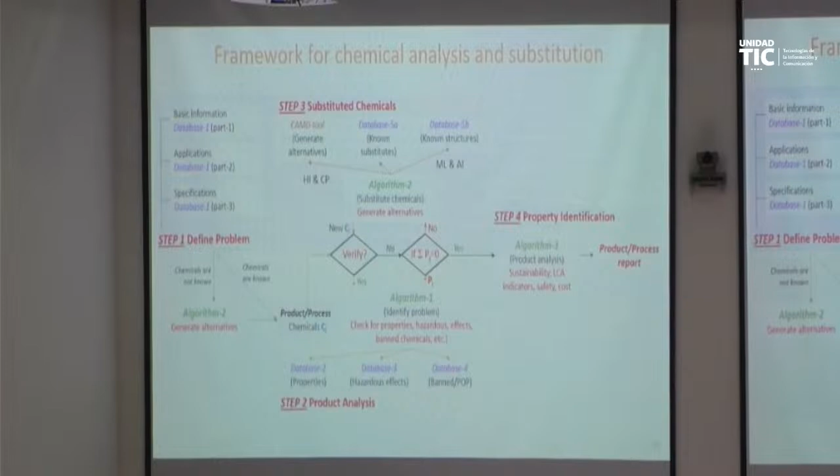So we need to have a framework where as soon as we find the chemicals that are in the process of the product, we can identify them, we can substitute them, and then we can say this product or process is safe. All the dangerous activity of the chemical has been taken care of. And if we can do that, then we will have a much better solution.

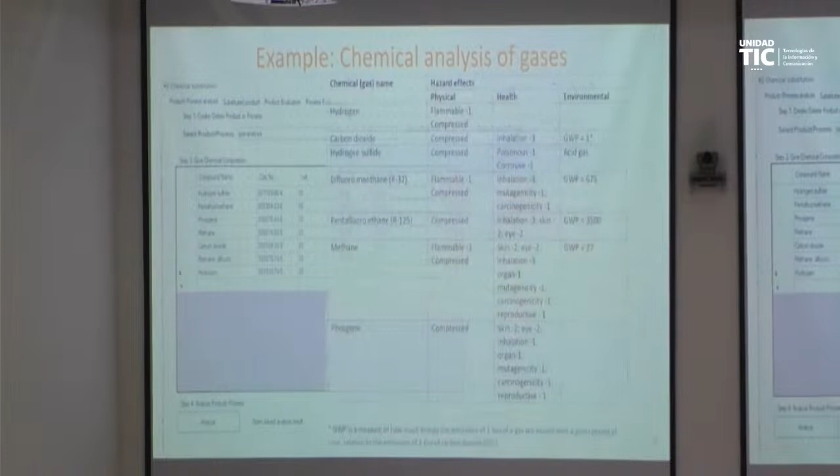Now, which one would you think is the most dangerous of this? Carbon dioxide, phosgene, refrigerant, hydrogen, methane. It turns out that carbon dioxide is the least dangerous.

Why are we spending so much effort to capture the carbon dioxide and make sure the emission is zero? It's because of the volume of carbon dioxide that we release. If the same amount of methane was released, we would all be dead by now. So we have to be very careful of these gases that can come out and what to do.

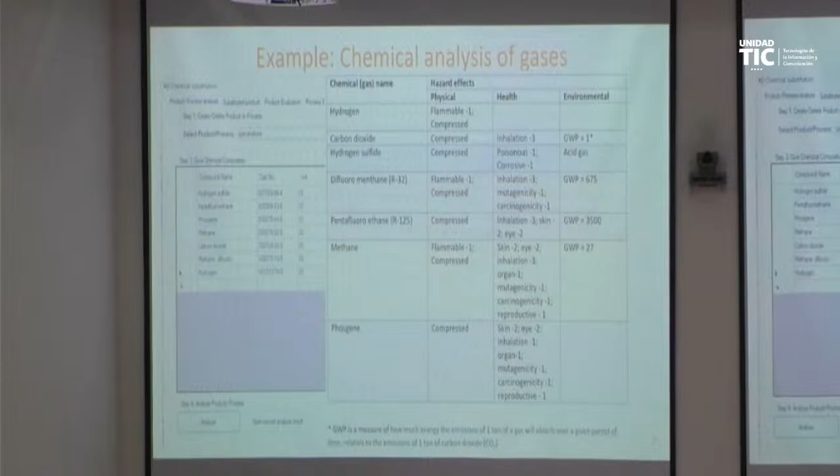Similarly, we can take solvents, and I put this example because I received a paper to review, and the authors were saying this is the magic solvent, organic chemical. I looked at how they found everything was fine, but then I said, well, let me check this chemical in my hazardous database, if it is hazardous or not. It was not only hazardous, it was listed as a banned chemical.

So it's not enough to find a process where a chemical can be used. One has to find, is it acceptable or not, and what precaution one should take. So I will not go through this in detail now.

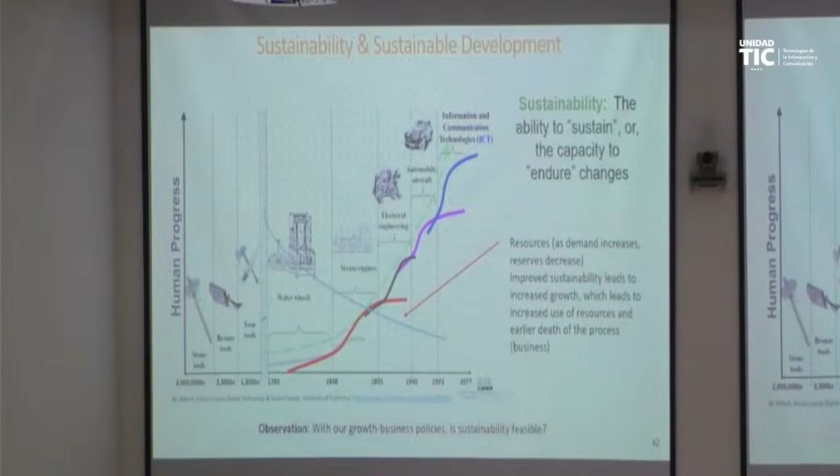So finally, what I would say is that we need to understand the problem and learn from our mistakes. We need to take action and use appropriate tools to take action, make wise decisions, or influence the decision makers, because sometimes it's the decision makers who make the wrong decisions. We need to help them to make the right decisions. Avoid trial and error solutions. Define target, match target - that's a much better way to do these things.

There is no trial and error there. Use methods and techniques consistently. Develop new tools if necessary. Evaluate benefits, both short-term and long-term. With that, I finish my lecture. Thank you for your attention. I would be happy to answer questions.